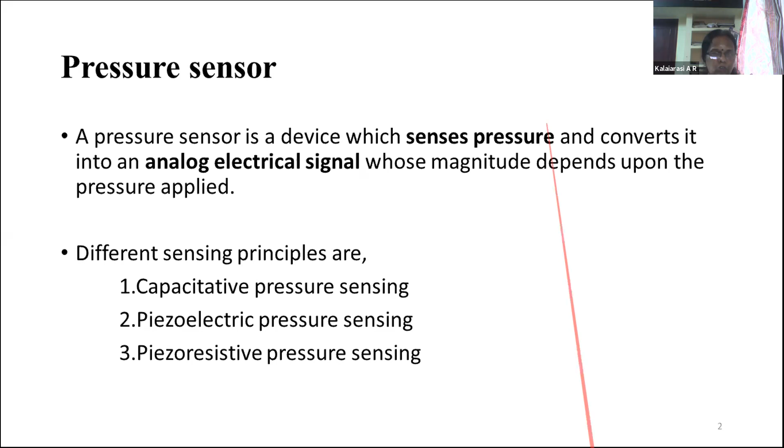This is what I explained, shown by means of the diagram, the applied pressure. For beginners who are new to MEMS, or new to MEMS software or MEMS design, this is the approach. So where to start? You have to start with a journal paper, and be clear about the basic equations. Maybe a pressure sensor is a very simple device, it doesn't matter.

You have to be very confident about your basic equations, governing equations, because the user should not rely only on simulation, since simulation is one of two things. You can measure, or you can do some simulation and get some result. But how to validate the result, that is very important. Even at UG, PG, or PhD level, you definitely have to validate it.

So for validation, before going for fabrication, because obviously fabrication is a very difficult one, and getting your fabrication facilities for fabricating MEMS devices - I'm not talking about meso devices. Meso, meaning millimeter scale, we can fabricate. But for micro scale or nano scale, after the simulation, or along with the simulation, we have to be comfortable with the basic equations.

You have to rely on some journal papers, or some MEMS-based book also. The fundamental equation is very important, and how fundamentally the device works is the next important thing. That is explained in this slide.

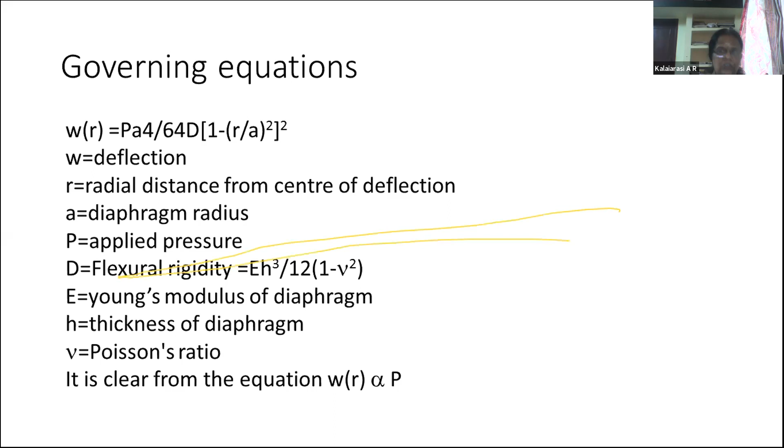As I already mentioned, the sensing methods are piezoresistance and capacitance. The fundamental equation for capacitance is nothing but epsilon A by d. Both things are shown here in the slide. So the first one is...

Piezoresistive, first one, and actually here it's a cross-sectional view. This is shown with only two piezoresistors. Actually it will be called a Wheatstone bridge circuit, which is the electronic circuit, because the MEMS device always has to be incorporated with the electronic circuit. Then only it's going to be a complete MEMS device, otherwise we can't call it either a MEMS sensor or MEMS actuator - otherwise it's just incomplete. So MEMS plus the electronic circuit, that is the integrated circuit, gives you a complete picture of the fabricated MEMS device.

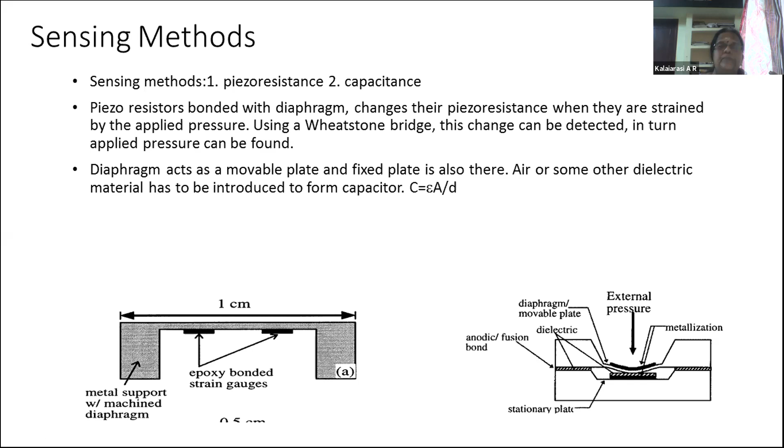Then the second part is the capacitive based sensing, which is also shown - I already explained that. So today's objective is we are going to design a capacitive based pressure sensor, then we are going to design a piezoresistive pressure sensor.

For that, note that we are using the equation. I'm not going to walk you through the equations and all, because once the equation is given, people are smart enough to calculate the values. So I'm just presenting my results for analytical values, and I'll be doing the comparisons, right?

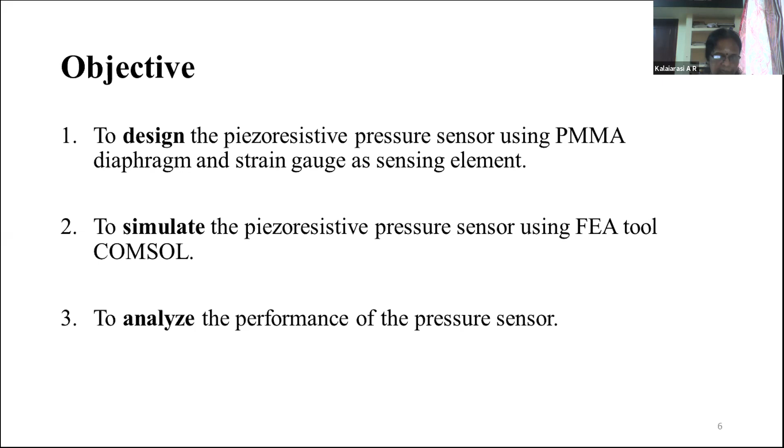Now we'll move on to COMSOL. I already opened one. This is COMSOL 4.2. Regarding the license, we can request the COMSOL people. We can get a one month student evaluation license, or we have to pay and purchase COMSOL. These are the only two methods.

So this is going to be the view of COMSOL. The first beginning is going to be this one. I have started from scratch, I have not even saved the name, I just started from scratch.

This is the model builder. I'm going to use the 3D builder. We have so many dimensions: 3D, 2D, 1D. We use 2D axisymmetric, meaning one dimension is factored out. If any one dimension is equal, say x and y are the same, there's no need to go for both x and y. We can use just x and z dimensions. That is the meaning.

Axisymmetric is for cylindrical kind of structures. After using COMSOL or any FEM based or MEMS based software, you can get an idea. So the next step, first we have to choose the dimension. I'm going to choose 3D. Then you click the next button.

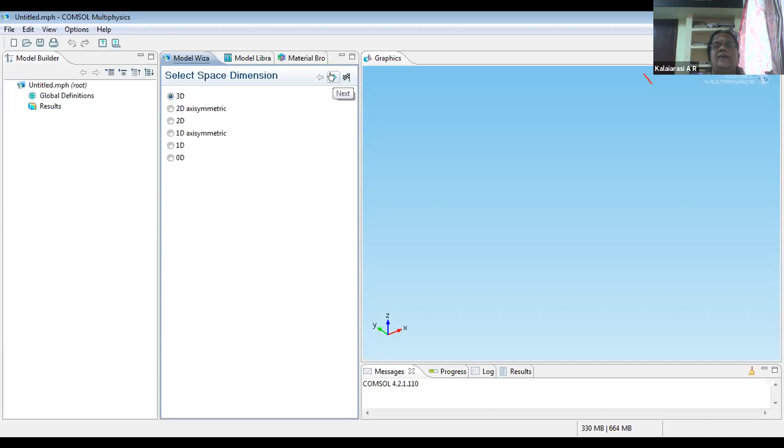So I'm going to choose 3D. Then next I have to add the physics. I'm going to use electrostatics and solid mechanics, and that's why I mentioned clearly in the beginning itself: the basics of the device must be known to you. The basic understanding of the device is very important. Without that knowledge, proceeding with simulation is ridiculous.

I know that I'm going to design a capacitive pressure sensor, so I will be applying some pressure, and there will be a change in capacitance. So I need both solid mechanics and electrostatics. I'm going to add the solid mechanics physics, then add the electrostatic physics. You can select both together or one by one, then click the next button.

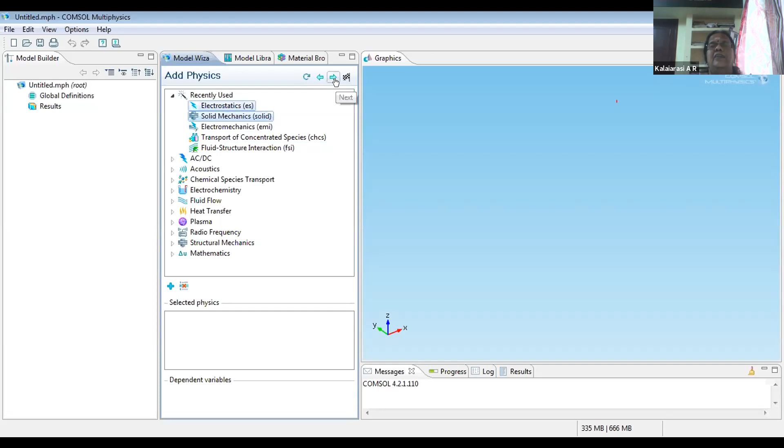Just press this plus symbol, or right click, you can also take the plus symbol, and you have to add this. It will take time because I have added two physics. Now it's added, so electrostatics you can see in the bottom middle of this window. Electrostatics and solid mechanics are added.

Then next it will automatically go to the study type. By automatically, I mean if you press this next arrow symbol, it will go to the study type. The study type I'm going to use is stationary, steady state. Then I'm going to click this flag symbol in order to finish.

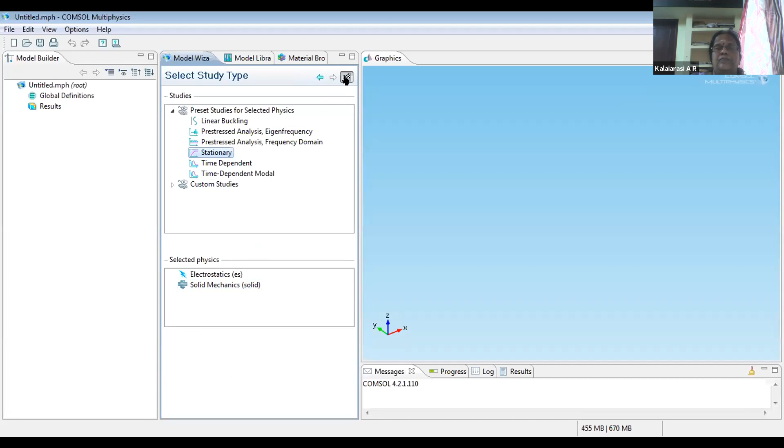Okay, so next we have to choose the length unit. I'm going to choose micrometer. The degrees I'm not going to change, let it be in degrees itself.

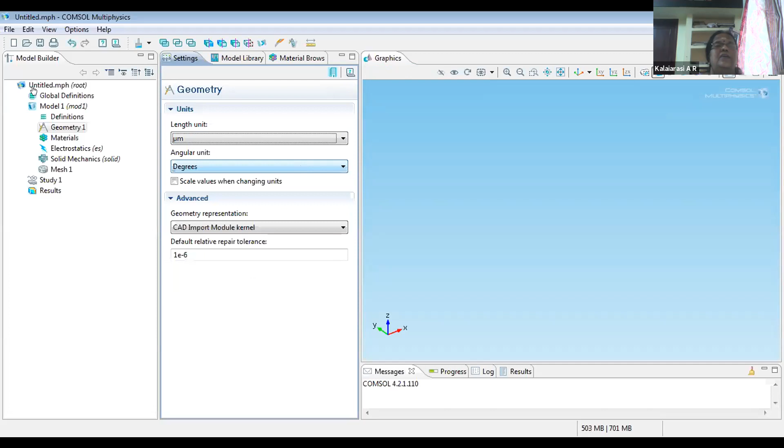Then on the left side of the model builder, the geometry is there, and I'm going to start with the geometry. You just click geometry and right click it, and then you can see blocks, cones, cylinders, sphere, and more primitives. So basic engineering drawing knowledge and knowledge of coordinates will help you build your structure. That is going to be very important.

Then the materials should be proper, material properties must be proper. Then the boundary conditions - the name may be different for different sources, but we are going to discuss COMSOL, so I'll use the same word, boundary conditions, that is the governing equations. If all three - geometry, material properties, and boundary conditions - are perfect, then you can get a proper result that you can rely on.

Okay, this is important, so using the basic knowledge we can draw the diagram. Now this is the beginning session, so I will use a simple structure only. I'm going to use a block, then I'll use some dimension - 400, then 400, and this is going to be the substrate. For the substrate, I'll use some 40 micron thickness.

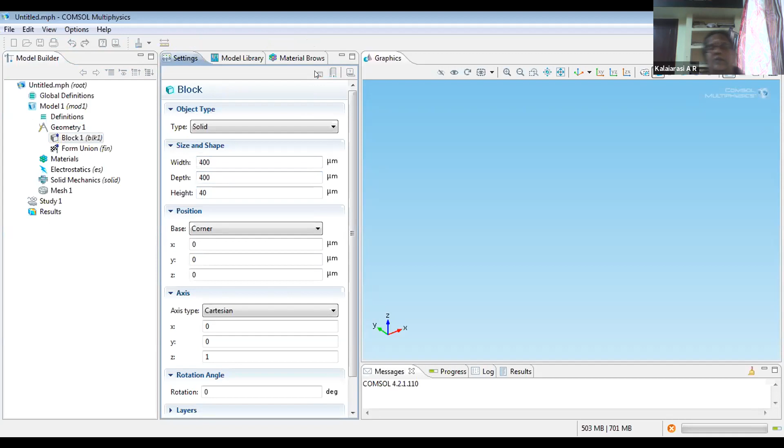Then you have to click build selected. In this blue side, you can see the structure, the block which is created, and you can use zoom extend and zoom selected - the zoom extend and go to default 3D view are two keys we'll be using regularly. These two are important.

Then this is going to act as my substrate. What is my idea - the substrate is going to be there, on top of the substrate I'm going to place a dielectric medium, and then on top of the dielectric medium I'm going to place a diaphragm. That's a very simple structure.

Then again, geometry, block. For this dielectric medium I'll use a simple structure, the same 400 length and width, 400, 400. But the thickness will be using 10 micron. We can change it - later also we can change, there is no fixed rule, but we always have to be concerned about the dimensions. Later we can change, but it will take time. So again, build selected.

Actually I have not mentioned the position, that's why it is not done properly. So I just want to keep this dielectric medium on top of the substrate, so my z position is going to be 40 microns. So now you can see, right, 40 micron - so again I'll show you.

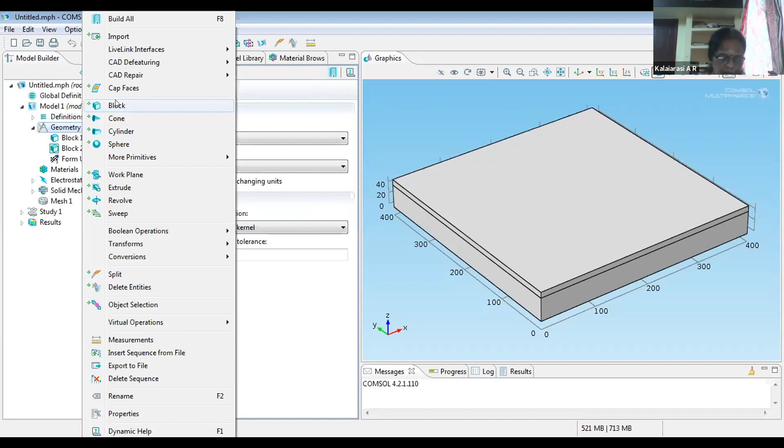If you want a circular diaphragm also, we can create that - I already did that. For easy understanding I am going to use just a block. Rectangular diaphragm will also do this, okay, block. And diaphragm in the sense it's going to have a very smaller thickness, so this is just 20 microns.

The same 400 by 400, and 10 or 20 microns. Actually when fabricating, a 20 micron device is not a validated one, it is not going to withstand the pressure at all after fabrication. That's why we'll use more than 50 microns, or minimum 50 microns. But this is just for simulation, that's why I'm showing you the height of 20 micron.

And this z position is going to be 40 plus - what is the previous one - 40 plus 10, so 50 z position. I'm not changing any other position. Okay, so now all three - the bottom plate, top plate, and the intermediate dielectric medium - are also done.

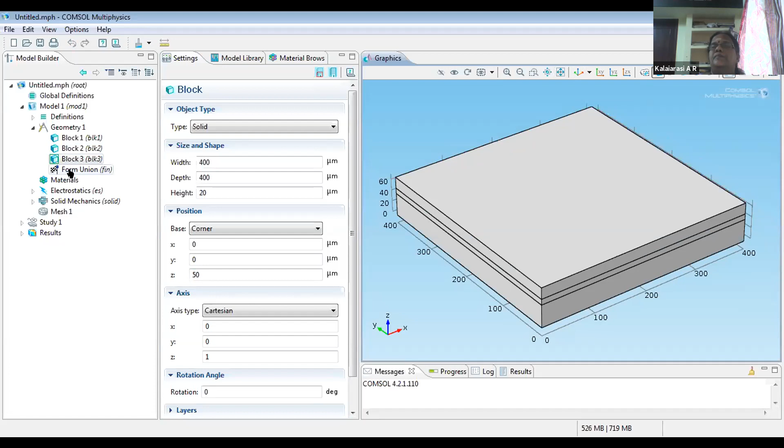Okay, then you have to use this zoom extend and go to default 3D. Then the next one is form union.

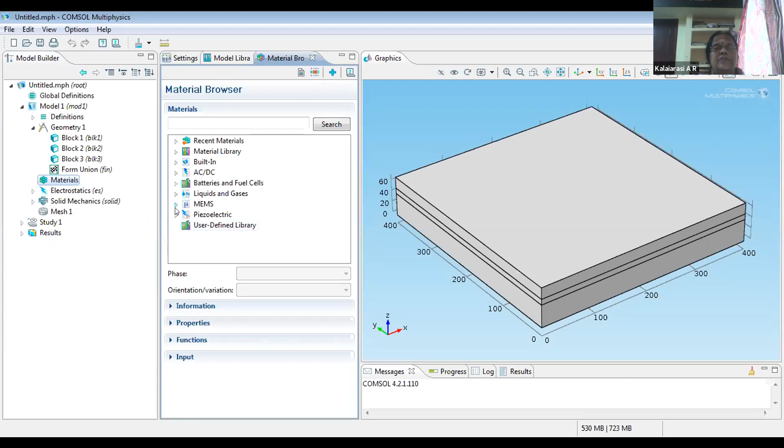Then we go on to the materials. Right click materials, open material browser. Then I'm going to give silicon for the bottom and top one, and intermediate I'll be using as SiO2.

Whatever material you want, you can search here, and you can even create your own material. That option is also available, but you have to supply the basic properties and advanced properties of the material. You have to search with the journal paper and go with them.

In MEMS, because I already know this, otherwise you can put it in the search box and get the materials. So I'm going to use semiconductor, silicon. Actually, an advanced version of COMSOL has so many materials available. Anyhow, for piezo resistor, I'm going to show you that. This is a basic one, and this is somewhat an easy concept.

Okay, silicon. Then we can right click, add material to the model. By default, all three blocks are going to be shown here, and I have to choose one more material, and search here for SiO2.

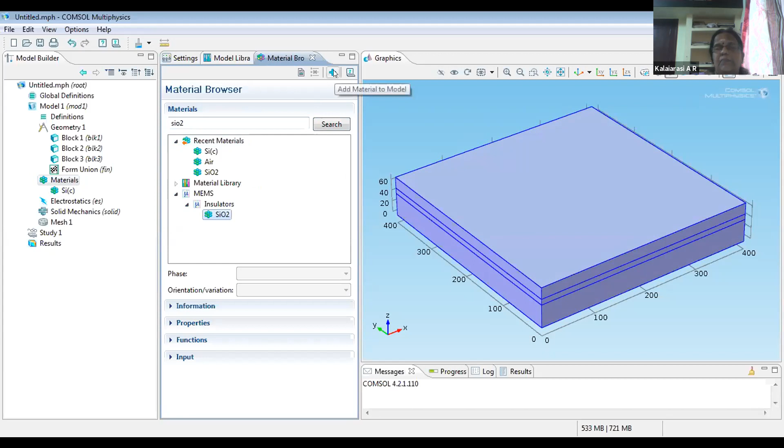Already I have chosen, that's why it is there. Otherwise, we go to MEMS, insulators, SiO2, right click, and the plus symbol. Or on the top of this material browser also, we have the same plus symbol. So the bottom and top plate is going to be silicon, and the second block I have to remove.

So I am removing it from selection. Then just go to the geometry, click it, and right click, it will add automatically. You just have to go to the geometry, click it, click, and then right click, and it will add it to the material, right?

And we have to check the material properties to see whether all material properties are given. If it is not shown, you can see a cross symbol here. If the cross symbol is there, it means something is missing. If a property is missing, the cross symbol is present, indicating there is some property missing in the material.

So you have to go to the material contents and type the values here. For example, epsilon if you want to change, or I'll show this for silicon, if instead of 170e9, that is 170 GPa in the model, I'm going to change it to 169 for my silicon, I can go and change it here.

169 GPa. Because that is going to be an important point, then only we can match our results with the analytical knowledge.

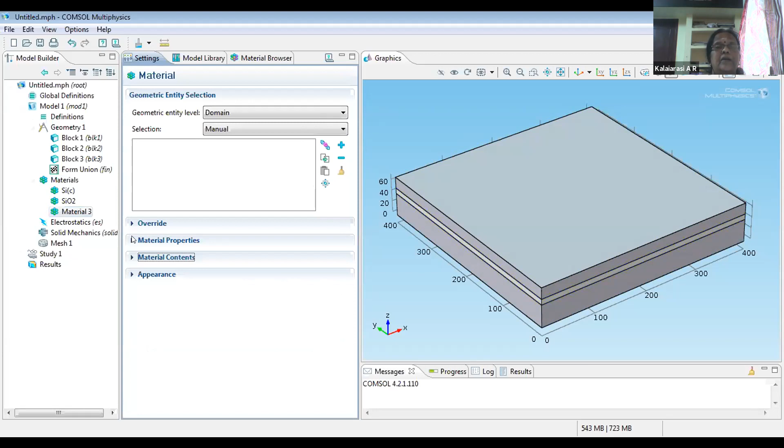And a new material can also be chosen. For a new material, you just have to click material again and right click. If you click material, it will ask you to go and include the properties, the material contents. The basic properties are what we add, so you can create your own material. Now I'm not going to use this, so I'm deleting it.

And the next one is the boundary conditions - the governing equations and the boundary conditions of the given model. So which part is going to have pressure applied, which is going to be fixed, which is going to be mobile. Mobile is going to be default, so I am going to concentrate only on the fixed one.

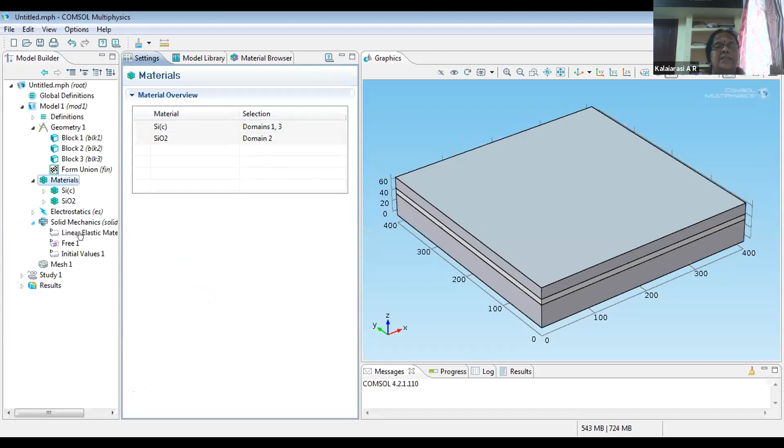So I'm starting with solid mechanics. You have to right click this. Already what we have done is the domain. Boundary conditions have to be given only to the boundaries, not to the domain. That's an important point.

In solid mechanics or structural mechanics, we deal mainly with the mechanical properties of the device. Without this, definitely the device is not going to work. So a fixed constraint, I have to give a fixed constraint.

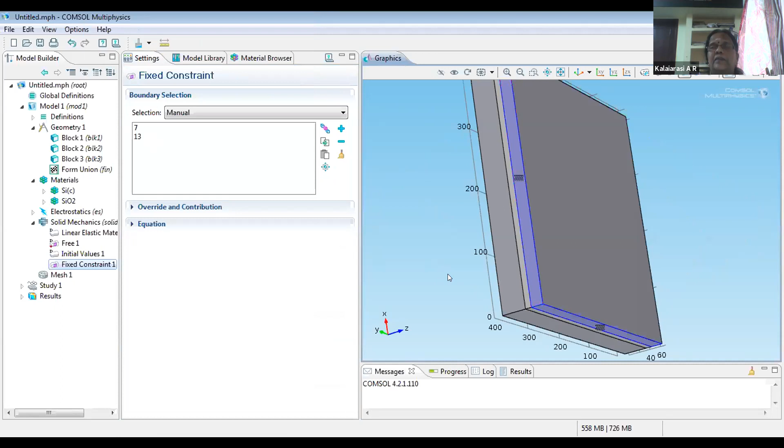The fixed constraint I'm going to give to the four sides of the diaphragm. Just click it and right click, you can add it to the boundary selection. Rotate and right click. Again for the default view, zoom extend and go to 3D default view. So this is going to be my fixed constraint.

How do I know this is going to be fixed? With the knowledge - you have to study about the pressure sensor, and if we have some fabrication knowledge or MEMS knowledge, we will be getting the same knowledge. Doesn't matter. Then I have to apply some pressure because this is a pressure sensor.

So again, solid mechanics. So what do I have to choose? Here we have to apply a load, so a boundary load. I already mentioned, if the structure is going to be 3D, then the boundary conditions are going to be in 2D. And if the structure itself is 2D, the boundary condition is going to be in 1D.

This is some custom you have to make in your mind, or you have to follow - this is what the software is following.

Boundary load. Then I'm going to apply the pressure here, and I can right click it. Then what is the value of pressure I'm going to give? Here, in the boundary load, we can see load defined as force per unit area, total force, or pressure. I'm going to use pressure.

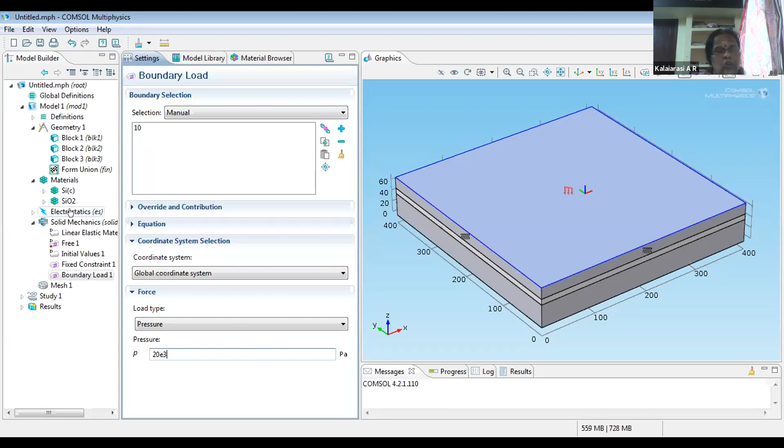Then again I'm going to electrostatics. Here in electrostatics, I am going to use it to calculate the capacitance - the changing capacitance. So electrostatic.

For that I have to apply the excitation voltage. For excitation voltage we have ground and electric potential. If I'm going to choose electric potential, I have to use some mathematical equation and then integration. Only then can I get the capacitance.

Instead, COMSOL is giving a terminal, and automatically we can calculate the capacitance. So I'm going to choose terminal - the terminal where I'm going to apply the voltage. So I'm going to choose the top voltage.

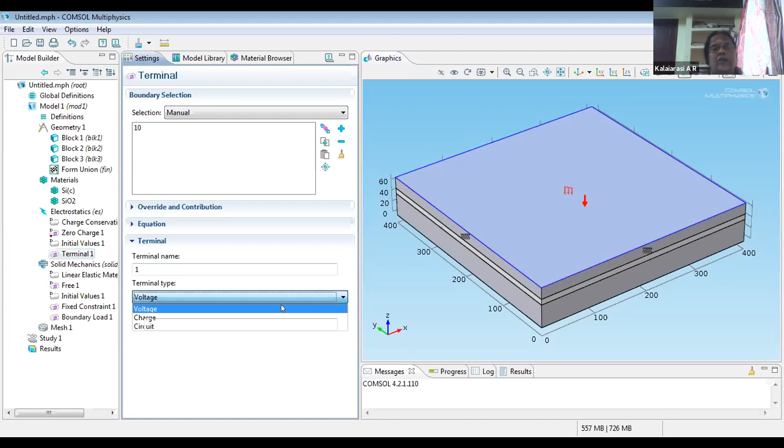Right click, and here in the bottom of this terminal type, I'm not going to apply charge. Instead, I'm going to apply voltage. So I have given voltage, let it be - it is just an excitation voltage. Let it be 1 volt.

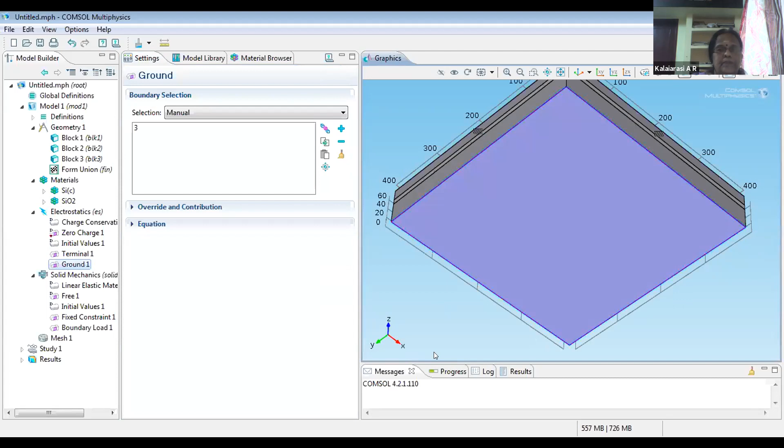Again, electrostatic, because now I have to choose ground. Electrostatics, ground. Then the bottom of the substrate I'm going to apply as a ground. There is no need to supply any value to the ground.

So we completed geometry, material, boundary conditions. One more important thing - these three are in the hands of the designer. That's why I told you we have to be very careful about geometry, material, and boundary conditions. But the boundary condition is very, very important, much more important.

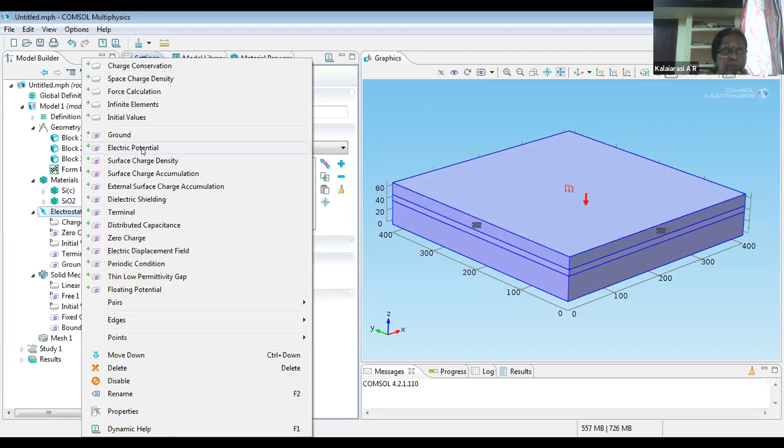Okay, terminal. So again, I'll explain to you regarding the electrostatic boundary conditions. We have to right click and choose this for excitation. I have to choose electric potential, as I already mentioned. I have to use some integration, then only I can find my capacitance.

The COMSOL is providing one more option called terminal. Using this terminal we can apply the voltage, and just by using a simple expression I can calculate my capacitance. That's why we are choosing terminal. Electric potential also, if you want, you can take and apply it, but it will take some more time to calculate what is the capacitance.

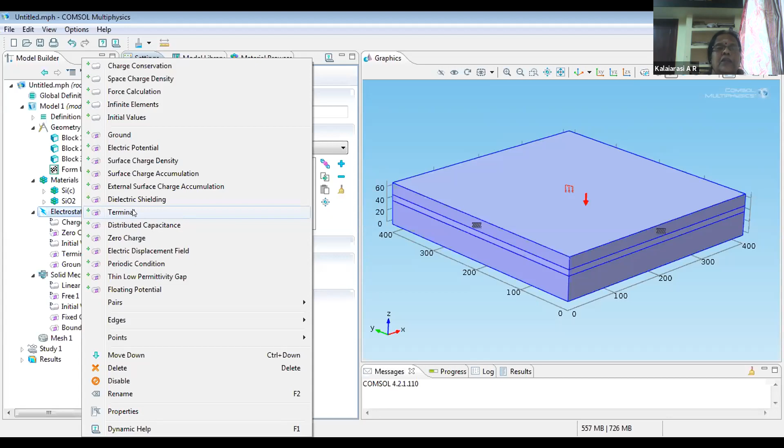So you have to click this terminal. I already created terminal 1. Then next is right click, then ground. So actually I created 2 terminals and 2 grounds, that's not required, so I'm going to delete this one. Just for understanding, I have created it again.

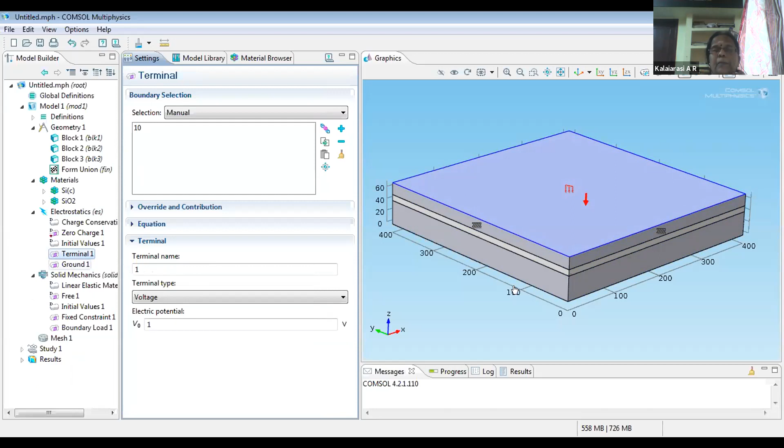So for terminal 1, I have chosen the top plate, the top side of the diagram. The default voltage is 1 volt, and let it be, because this is just an excitation, so I have just given 1 volt. Then for ground, I have chosen the bottom of the substrate, and for ground there is no need to keep any voltage, by default it's going to take it as 0 volt.

So the boundary conditions have been given. The geometry is completed, material is completed, and boundary conditions are very simple in this section, that's why I'm choosing a very simple structure. All 3 are completed, and all 3 go hand in hand with the design. That's why I already told you these 3 are very important.

Then the next is the mesh. For beginners, it is very good advice that they just go with the mesh option which is available in the COMSOL itself. After getting some experience, and if your device is very complicated, having a very small dimension...

Maybe 2 micrometers, and one part of your device is going to be 500 micron or maybe 1 millimeter, these much differences are there. The same device is going to have 1 mm and as small as 2 micrometer, because lesser than 2 micrometer is not fabricated at all. Even fabricating 2 micron is also very difficult.

For example, I have taken 2 micrometer. So if your device is going to have a structure of 1 mm and 2 micrometer in the same device, a part is going to have 1 mm. In that kind of thing, definitely the normal mesh is going to consider only the 2 micrometer dimension, and it's going to mesh all the devices with 2 micrometer or lesser. Meshing means dividing the device into smaller modules or smaller mesh.

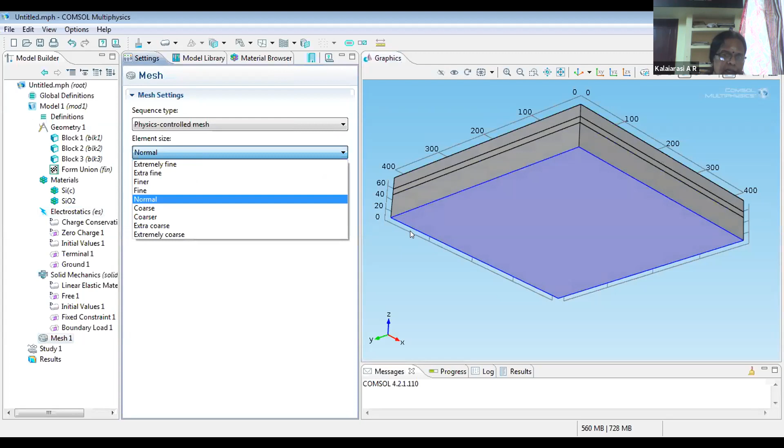So this is the mesh, right click it, physics-controlled mesh, and the element size is normal because the geometry which I have shown is a normal geometry only. It is not going to have a smaller structure, it's a normal basic structure, so I go with the normal element size.

So you can either right click the mesh and give build all, or you can click in the model settings window also, one build all icon is going to be there, you can click that also.

This is nothing but meshing. This is called a mesh, and all these terminals are called nodes. If you want to get some idea, you have to go with any basic FEM course. After getting some FEM knowledge, if you are coming for the simulation, then it will be good.

For normal devices, we can do the meshing as I already mentioned, but if it is a complicated device as I mentioned earlier, then definitely you should get some knowledge, you should have some knowledge of meshing, then that is definitely going to help you.

How many elements are there? That is also shown here - around 5,000 to 6,000 elements. If the elements go beyond 1 lakh, your computer is definitely not going to be able to solve the problem.

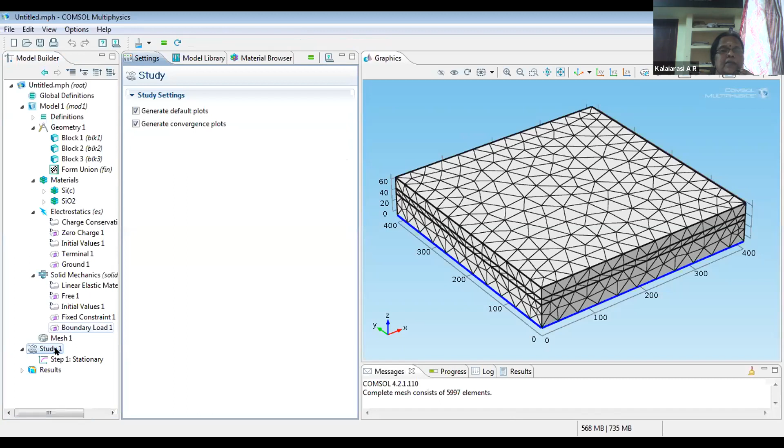You can see here, it is solving the problem - that's why it is showing this. Now this is completed.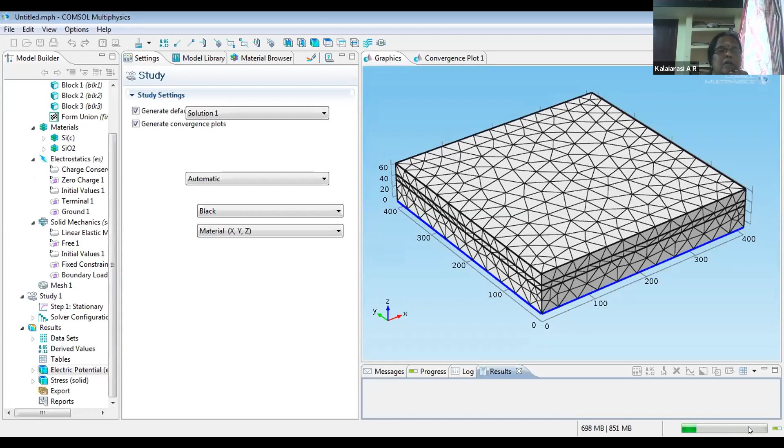By default the COMSOL gives results. Actually, the geometry, material, boundary conditions - all that is pre-processing. Then solving, that is the steady state solver, solves the problem. Then the results section is called post-processing. These three are very important in any FEM-based software.

So in post-processing, COMSOL gives some basic or default graphs. If you want, you can change them - I'll show you how.

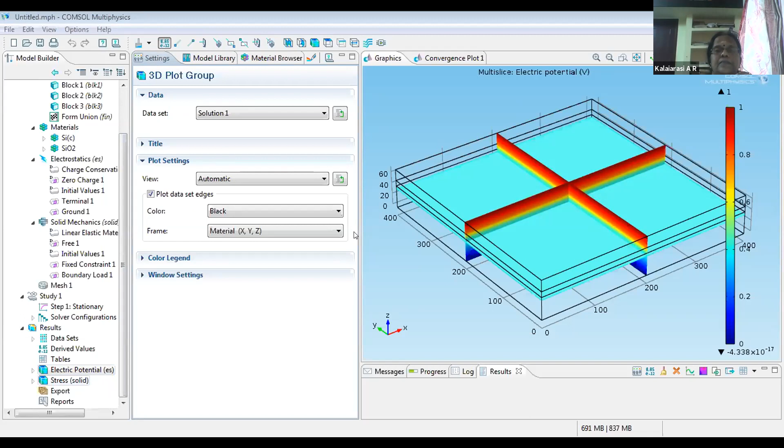What is shown here is the electric potential - the voltage that was applied, nothing more than that. And the multi-slice option, which is already available in COMSOL - this is the default.

Now I would like to see what is happening - I have applied some pressure, so I want to see the stress. You have to click on the left hand side - click stress, then surface, and in the middle of the window you can see Solid von Mises - this is nothing but von Mises stress.

The pressure is applied - what is happening to my diaphragm, how much deformation does it undergo? That you can understand from the von Mises stress, and the unit is Newton per meter square.

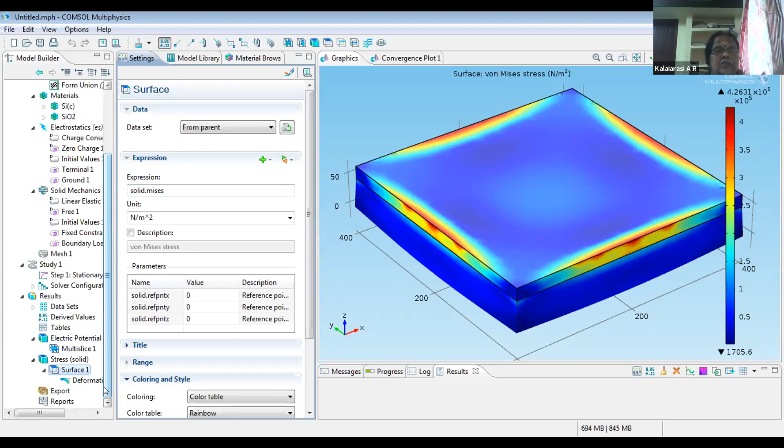Then if you want to see a new result, you have to right click result, then 3D plot group. Right click the 3D plot group, and I'm going to go again with the surface option - you have to play with this.

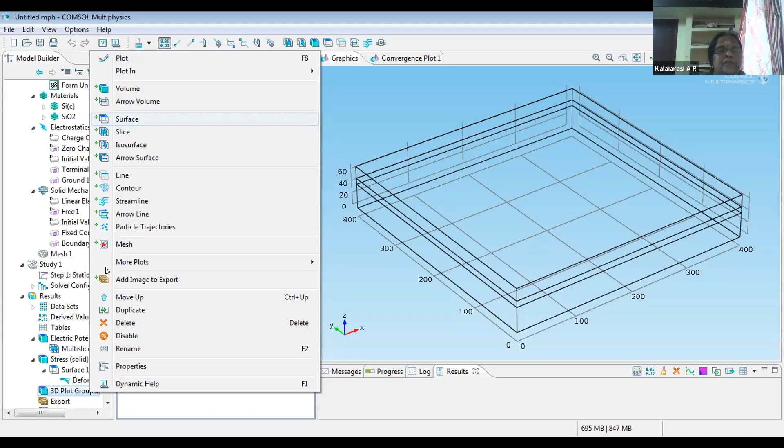So many options are there - arrow, multi-slice, isosurface, so many things are there, each doing it differently. Then here, replace expression - I hope the audience can see this.

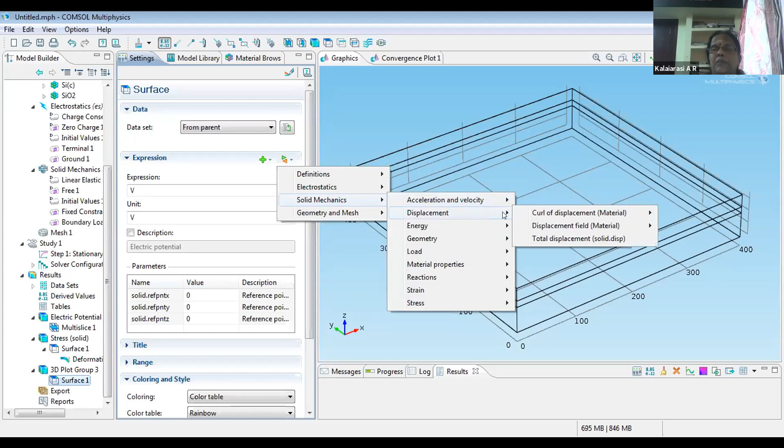So in replace expression, solid mechanics, because here I am going to have my displacement - I know that because it's a mechanical problem. Total displacement, then the unit is going to be in micrometer. Then click this plot - yes, this is going to be my deformation, total displacement.

I'm going to take this here - yes, 3.3507 into 10 power minus 4 micrometer. Since I have not changed any material properties, that's why I'm getting this result.

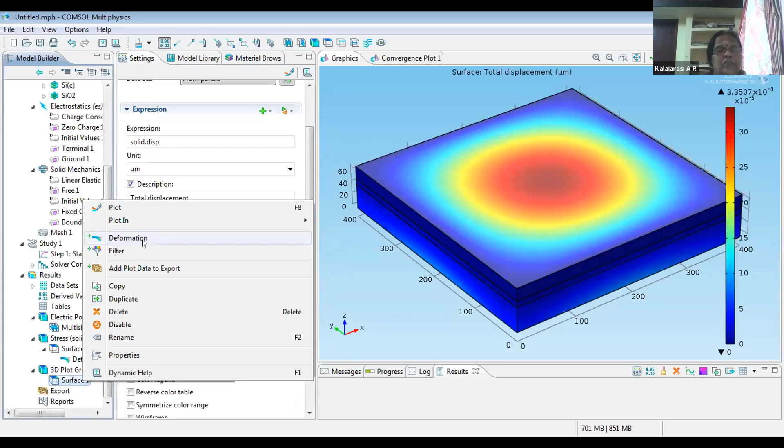And if you want to see the deformation also - because this is just shown with color changing - if you want to see it with actual deformation, that is also possible. Surface, deformation - you can adjust the scale factor. Now you can see here, adjusting the scale factor.

Based on that, you can see here - you can adjust this because already this is 86,000 something. If you want to change it to 1 lakh, you can change this.

This is just post-processing, to view or present the results. You can also do a 2D plot and a 1D plot - so many options are available.

Now we'll move on to electrostatics. I just want to measure what is my capacitance. Already the voltage is there.

Now we will change the pressure, or I'll show you how to do the parameterized sweep. Then we will see how to calculate the capacitance.

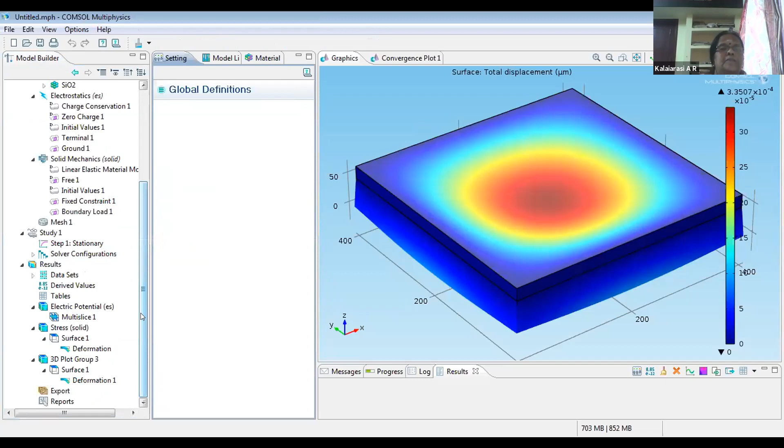For the parameter, you have to go to the lower section. Previously I had just given only 20,000, or 20 kilopascal. Now I'm going to vary the pressure from 10,000 pascal to 15 kPa with steps of 1000 pascal, and check what is happening to my diaphragm.

For that you have to use global definitions, parameters. In the name you have to apply, just give the name P naught. Then value, the first value will be 10,000. Description: applied pressure.

Actually, I have not saved the design. If you want, you can save this. Then you have to go to the study.

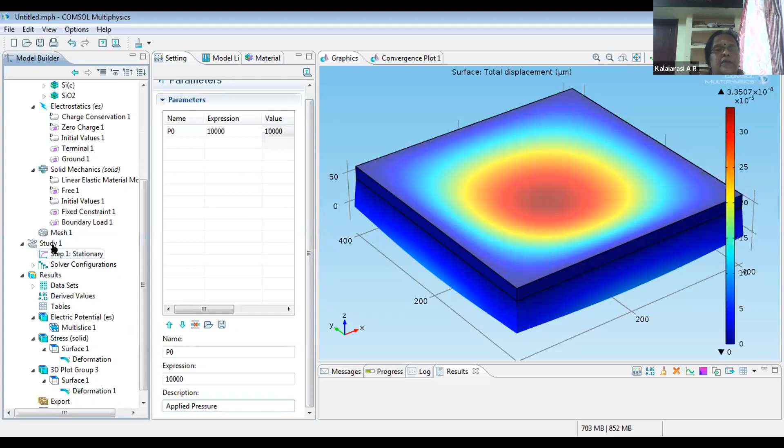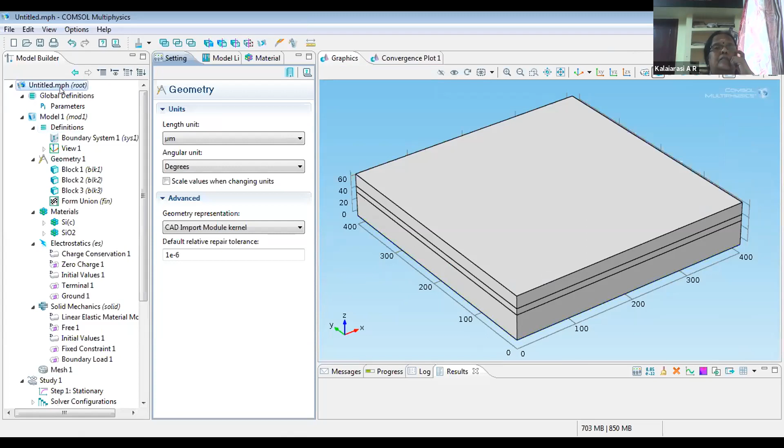I'm going to add one more study, because in the same stationary step also we can add the parameterized sweep, or we can go with a separate one. That is up to the designer only. So I'm going to add another study. This is study 2.

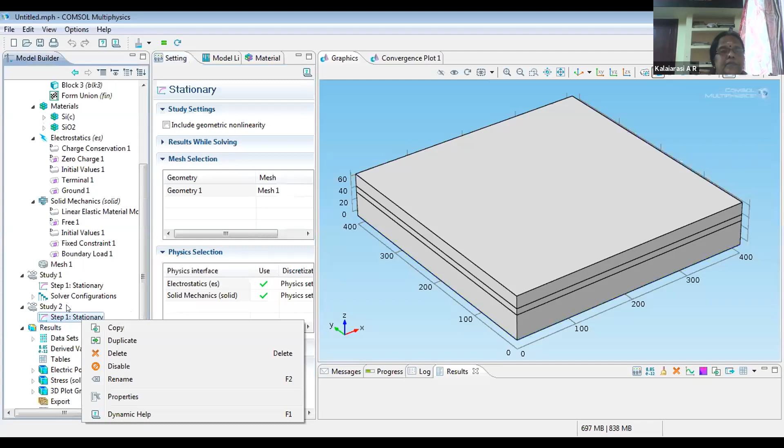Right click study 2, parametric sweep. Here we have to use the parameter values range, so we keep the range. Select this range. Starting with applying zero pressure is not the right kind of thing, so I have started with 10,000. Let's go till 15,000.

Then step maybe 1,000, just 6 values. Whatever values you want, you can give here, but according to the number of values it's going to take longer, that is the difference. And I have to input the parameter name here. Add.

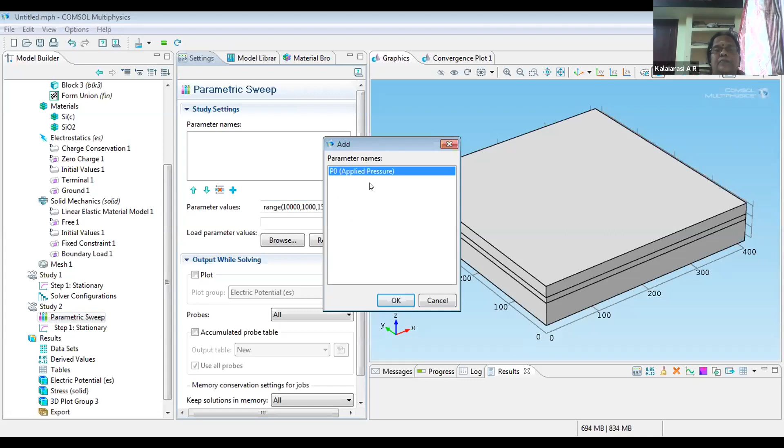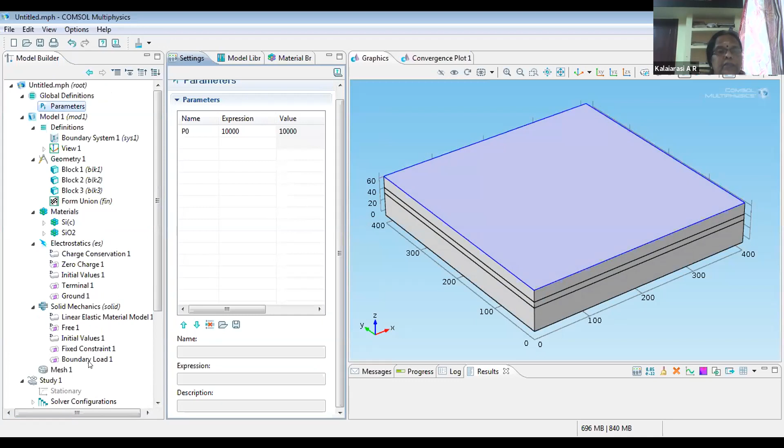Suppose if I give it wrongly, it will indicate in red color, you'll be able to see, or after completing it will show the error. Let me check and confirm whether I have used the same parameter name. Yes, I have used the same P naught as my parameter.

So for study 2, now it's going to solve it for 6 values, so it's going to take some time, some more time.

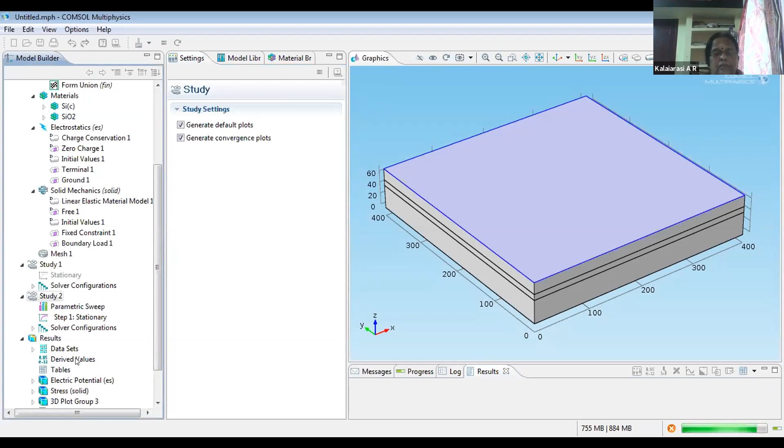The default plot of the electric potential, that's why it is showing the same plot. Let's move on to the stress. You can able to see here P naught of 6 is 15,000, right? So Surface 1.

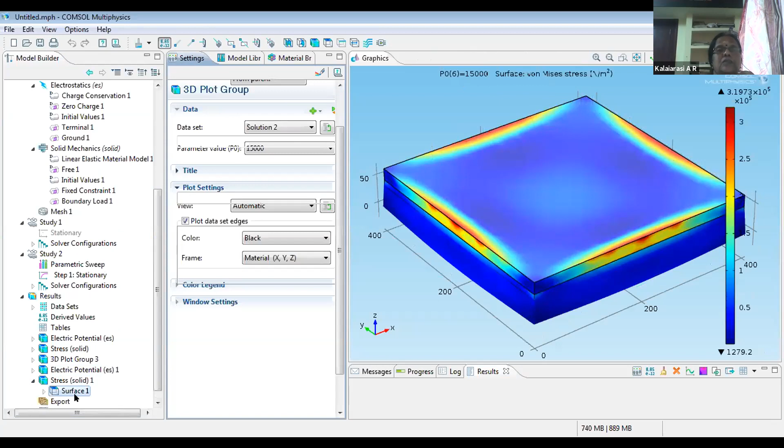And time also we can change. Display each frame for 0.1 second is the default, so you give some 10 seconds. It is also given.

You'll be able to see, you're going to play this. You can able to see 10 seconds. I have changed the time to 10 seconds now, that's why it's taking 10 seconds time. 11,000. If you want, you can play with the time.

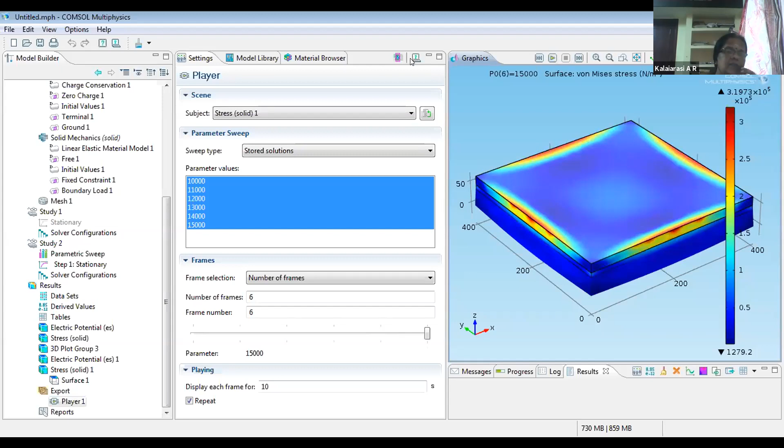Oh, my screen is not visible. Everyone, I have to share it. The screen is visible, ma'am.

Visible only, no? Okay, now I'm getting some messages here, that's why I'm asking. Put this stop, then we'll move on to the capacitance calculation.

Because the capacitance I'll be getting in this window, the right side bottom of this. So only I can able to see this.

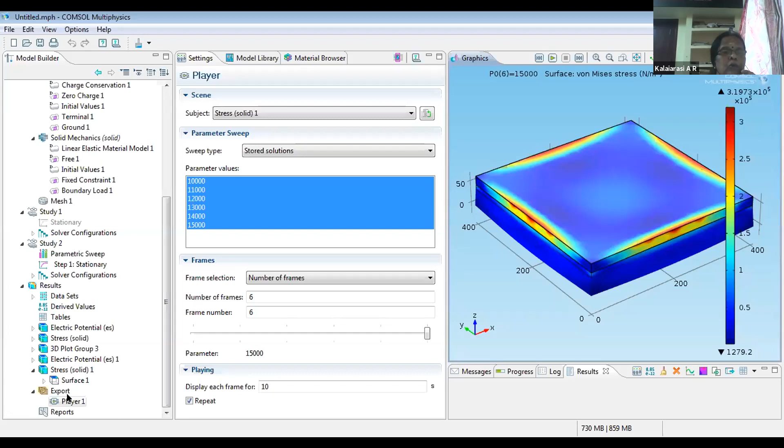So how I'm going to do is, just go with derived values, right click, global evaluation. Then in the expression you have to choose electrostatics, capacitance, then the symbol is going to be there. Physical symbol, and we have to get this capacitance, 1.8 into e power minus 13 farad. So this way you have to calculate the capacitance.

And now we will move on. I hope the capacitive pressure sensor simulation we are able to understand. Then we move on to the piezoresistor. If you are having any doubt in capacitance, later we'll discuss.

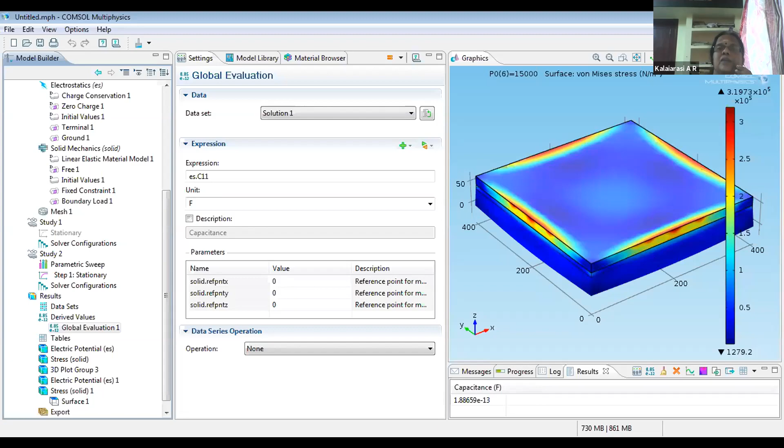I close this window and I share the other window. Just a minute, give me a minute.

Because COMSOL Multiphysics 5.5 or higher versions are only having the piezoresistive physics, that's why I'm changing my application to the newer version. Once it is open, I will share the screen. It's not opening.

And actually, I have not mentioned how to save. This is just like our other Windows application files, how we save in Word or Microsoft Excel. Similarly, we can go to the file window and save it. Okay, it's not new.

I'm using both the COMSOL Multiphysics, it's taking time. But we have to... COMSOL Multiphysics 5.5 is opening.

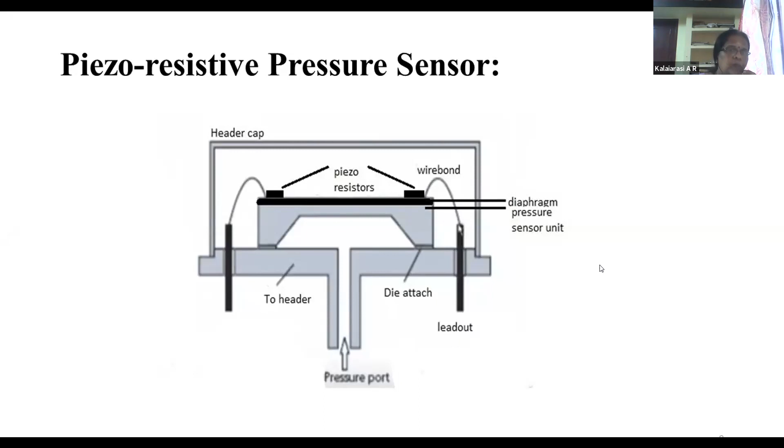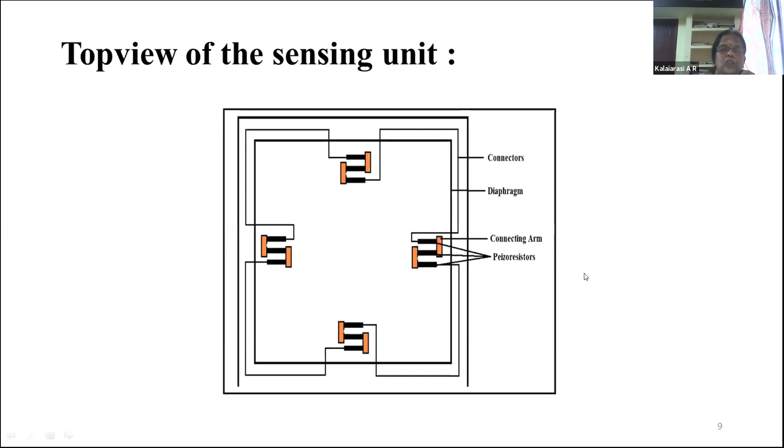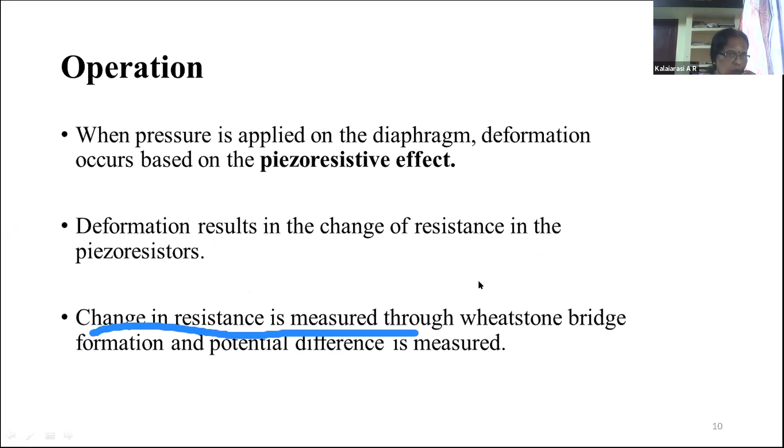Then this is going to be the top view of the sensing unit. The same structure only I have created in COMSOL 5.5. I'll show you. Then how it is going to work is: if the pressure is applied, the deformation occurs on the diaphragm, and then the deformation results in change of resistance of the piezoresistors, and the change in resistance is going to be measured through Wheatstone bridge, and the potential difference is going to be measured. So this is going to be the operation. This is already known to you.

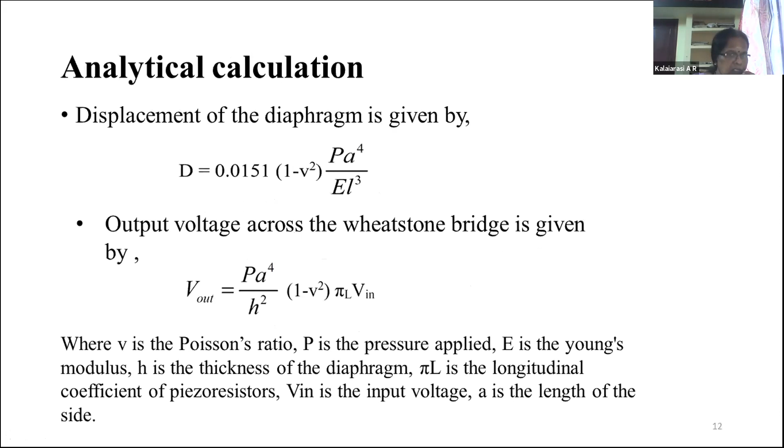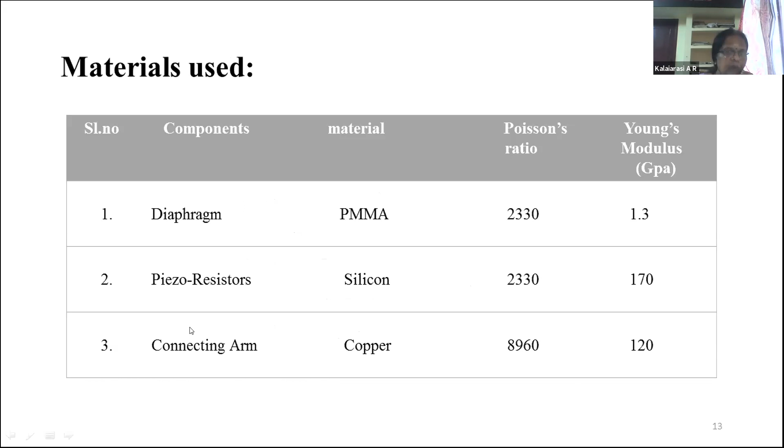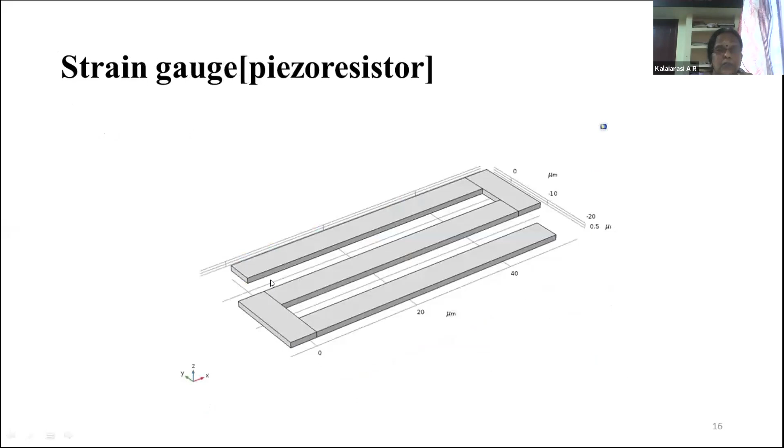Diaphragm sure, this is also a 5 micron or 10 micron thickness. Then the stress analysis - already we have done this one, and this is the piezoresistor dimension, right? Single piezoresistor. Similarly, 4 piezoresistors we are going to place, and then we are going to connect using copper connectors, and this is going to be the structure.

This is taken from the COMSOL model only. I will check - everything is open. My COMSOL is also open already. But anyhow, we will complete this and we will go on to COMSOL 5.5.

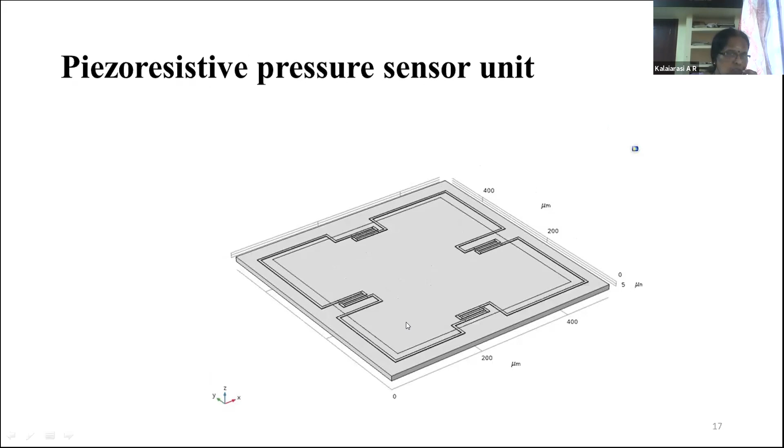The same structure I have recreated in the COMSOL, and the displacement we will have seen. This value is not going to be comparable with our shown demonstration, so the disk capacitor sensor - the material is different, geometry is different. But for this one, for the given dimensions of the piezoresistor, this is going to be the displacement, right? We'll move on to the COMSOL now.

Now I'm sharing COMSOL Multiphysics 5.5. I have already done this because now we are running out of time. So I will show them - already built one, I will show that one.

Here, what are the changes? I already told you - the first thing, we have to start with the dimension. That is going to be 3D, the space dimension is going to be 3D. That is not changed. Then the next is the structure - structure dimension is going to change here.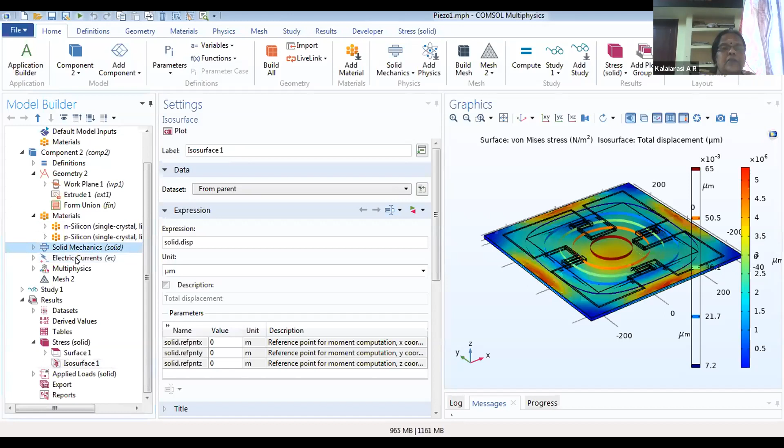The physics which we have to use must be piezoresistive. If you want, you can make a note: solid mechanics. Then we have to use the piezoresistive. So if you are going to right click, add physics, it will create a new window.

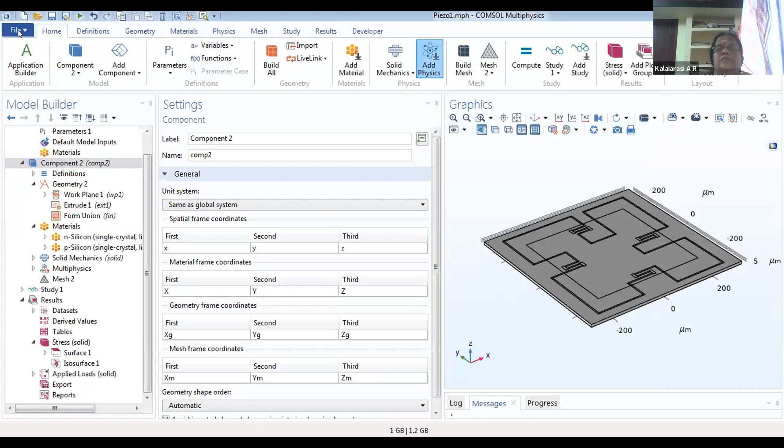Piezo-resistivity is not available there, so I added that component. We can directly add it and run the simulation as already mentioned. Everything else remains the same; only the boundary condition is going to differ.

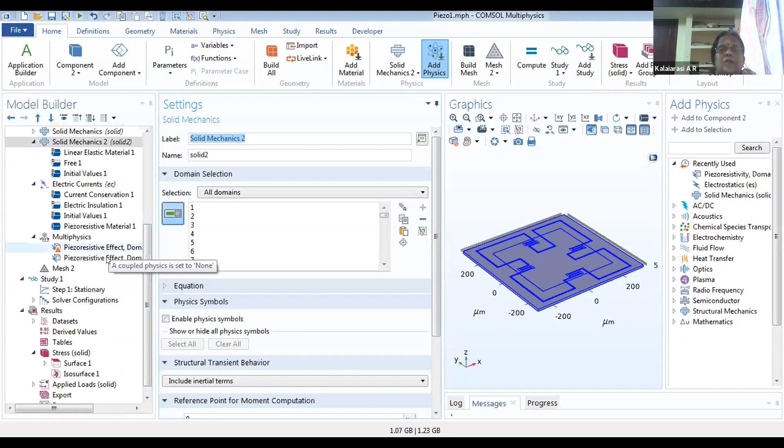You can see the structure here, showing the material and machine setup. This is silicon, the bottom plate, and the top membrane is also silicon. Then silicon is used for the piezoresistors, and I have changed the connecting arms. If you want the connecting arms to be copper instead, that is also possible.

I have done so many simulations, and this is the final one. Moving on, this is version 5.5, and there are many recent options available here, like piezoresistor and piezoelectric, which are somewhat easy to apply. You can also run your COMSOL file as an application window. That is also possible here.

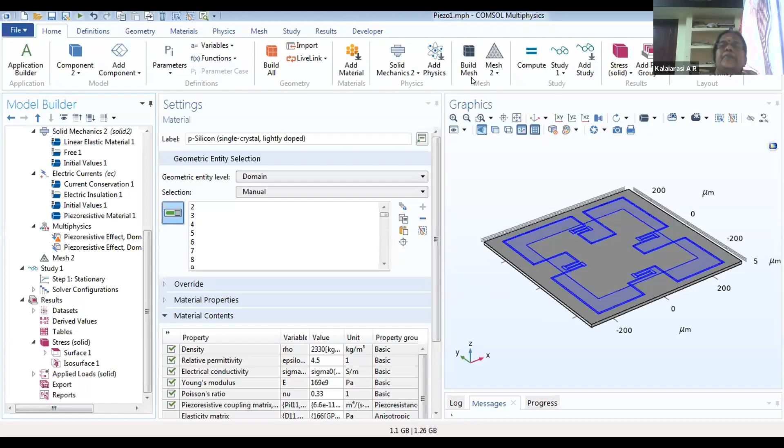We'll move on to the presentation. So in the piezoresistor pressure sensor, this is the displacement screen. After this, we can capture the window and show it in a PowerPoint presentation, or use it for your thesis or something else.

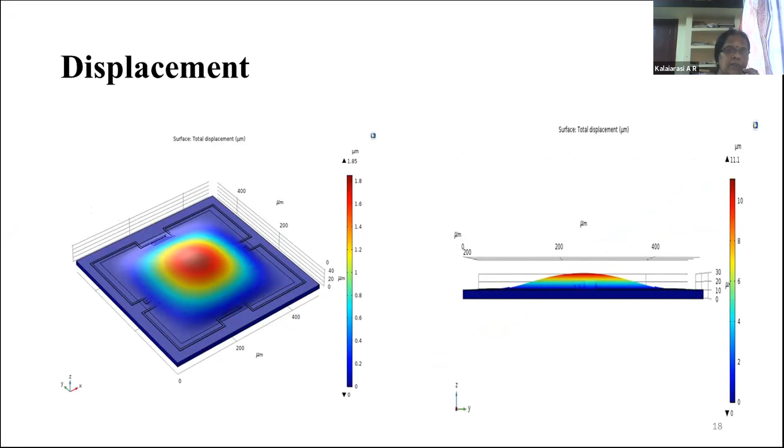For the pressure applied, from 10 to 50, we have to calculate it. I have shown it in the COMSOL window itself, and we have to use these values. You can either take the values as a table or manually note them down and use Excel to make the graph. Actually, we'll be doing the graph in Excel only, so that's somewhat easy.

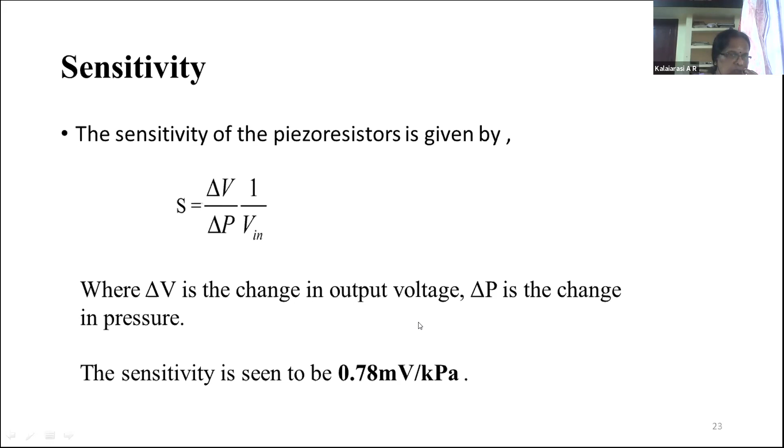And sensitivity, as I mentioned, we have to calculate using this equation: delta V by delta P, where delta V is the change in output voltage and delta P is the change in pressure. We calculate the change in pressure and the change in voltage, and that comes to 0.78 millivolts per kPa.

So the conclusion is the pressure range is limited to 0 to 40 kPa for better sensitivity and linearity. The displacement varies linearly with the pressure, as shown in the graph itself.

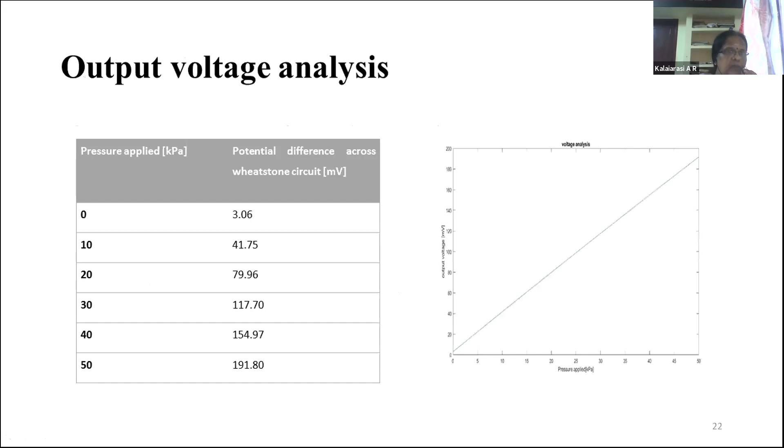This is varying, and both values - simulation and analytical - have been done here. That's why I told you it's always better to use both analytical and simulation. The difference is definitely going to be there, but at least it should match with the simulation and with the analytical, because the analytical formula is not going to change.

If there is any problem, it's definitely going to be in our simulation while designing - that is, in the geometry, material, or boundary conditions, we would have made some mistakes. That has to be cleared and corrected. Only then can we do the comparison with the analytical. So always don't rely only on your simulation; you have to compare it with either the fabricated results or the analytical results.

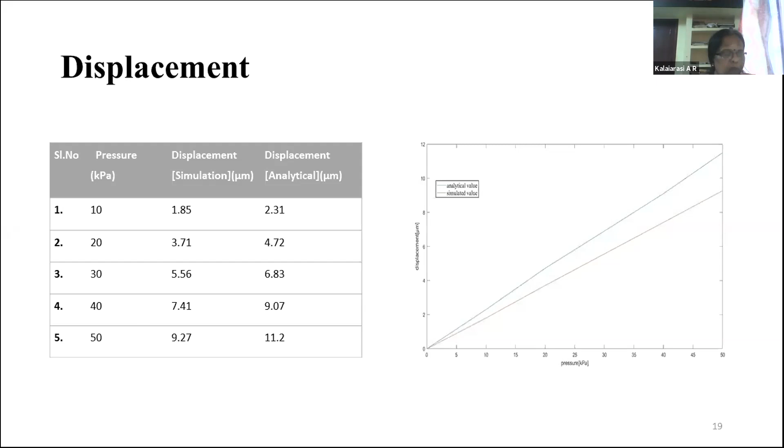Fabrication is definitely going to be difficult, so we can do analytical results instead. Even my UG or PG students, for validation, will go with the analytical calculations.

So for change in resistance, the conclusion again: the displacement linearly varies with the pressure, and the sensitivity can be improved by proper placement of the piezoresistors in the high stress region. We already placed it in the high stress region, but more proper placement can be done.

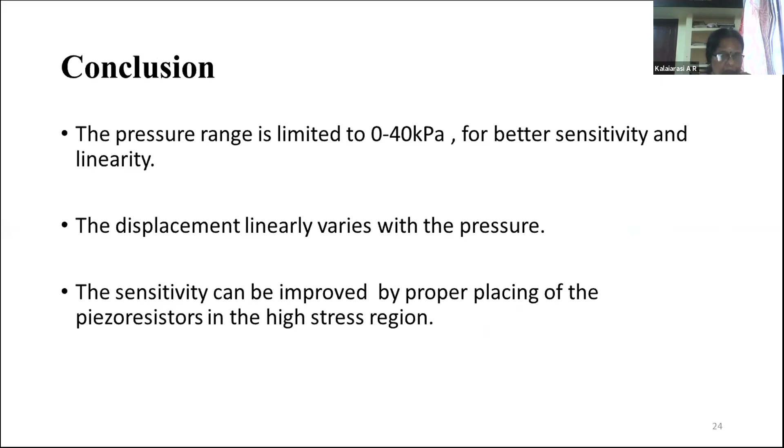For the audience, here are some more thoughts: if you are able to access CoventorWare or any MEMS software, you can resimulate the same piezoresistor or capacitance design. For the capacitance, whatever change you adopt - we already did it with the rectangular diaphragm - you can just convert it into a circular diaphragm.

I've also done that simulation with me. Similarly, you can also use the circular diaphragm, and you can change the material. Instead of silicon, you can change with PMMA, that is polymers can be replaced, or polycrystalline silicon can be used. And even for the substrate, you can change different substrates and see how it is working.

The substrate is just giving a mechanical protection. But anyhow, you can change the diaphragm and material, and check what is happening to either the capacitive pressure sensor or the piezoresistive pressure sensor. So these kinds of changes can be done for the simulation side, and corresponding analytical calculations can also be done. You can compare both, whether the circular diaphragm is working fine or the rectangular one is working fine, or any other diaphragm.

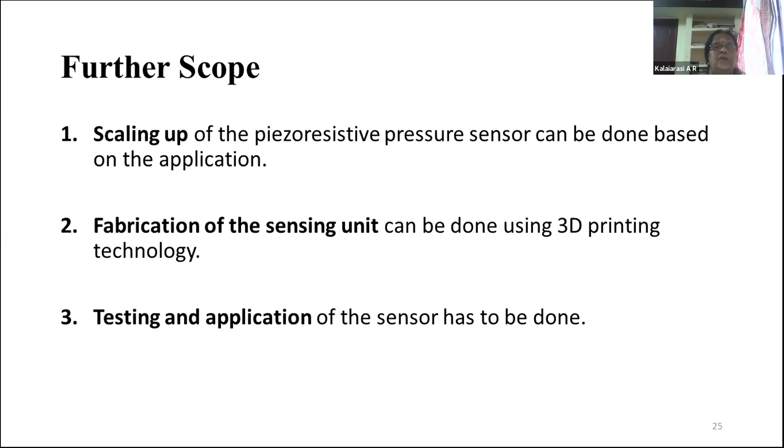Yes, any questions? Yes, ma'am. Thank you so much for the wonderful session, ma'am.

Whether I have to extend it, or is this correct, ma'am? Is the timing okay, or is there still time? No, you're on time, ma'am, you have kept your time well. Okay, there are a few questions, ma'am.

Let me start with the first question. Which version of COMSOL is great for beginners? COMSOL 4.2a would be better.

The next question is, what is the importance of meshing? Is it possible to design a localized surface plasmon resonance based sensor in COMSOL? Without meshing, we can't do anything with FEM-based software. So meshing is very much required, because all the governing equations, whether electrostatics or any piezoresistive equation, are solved only for a single mesh element. Then that is continued or shared with the next node. This is the basic way FEM-based software works. So without meshing, we can't do anything in FEM-based software, and almost all MEMS devices or MEMS software are based on FEM-based software, so we can't avoid meshing. Meshing is very much important.